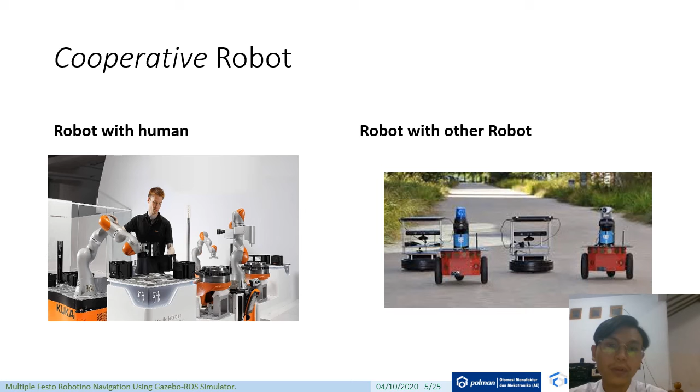So in multiple robots, we know the term cooperative robots. There are robots that work with humans and robots that work with other robots. But in this paper we are just focusing on robots with other robots. In the multiple robot system, we are using state behavior control for the algorithm.

The algorithm being used is the bug zero algorithm, and while the algorithm moves from a place to the goal position or the final place, we are going to record the environment or the surroundings of the robots by modeling a 2D map to see the surroundings.

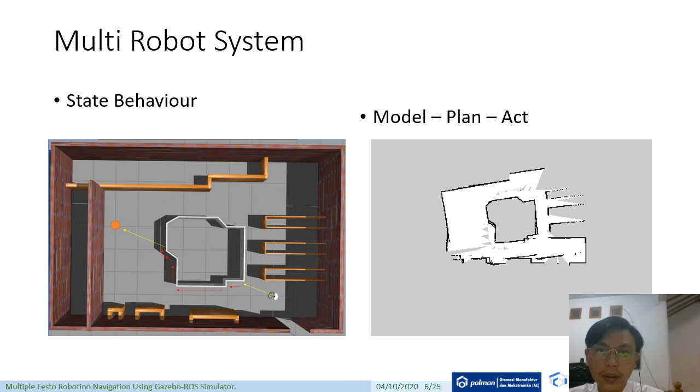In this system, we are working with the open source Robot Operating System. Why are we using this? It is because it is available for most robots, it is easy to modify, and it is low cost. So I can say that it is free to use. And this is the motivation of the project.

As I stated before, we are currently facing Industry 4.0. We're going to face a lot of development of robot technology, and also recently we use multiple robots in industry, especially smart warehouses, and we are currently introducing open source systems for robots.

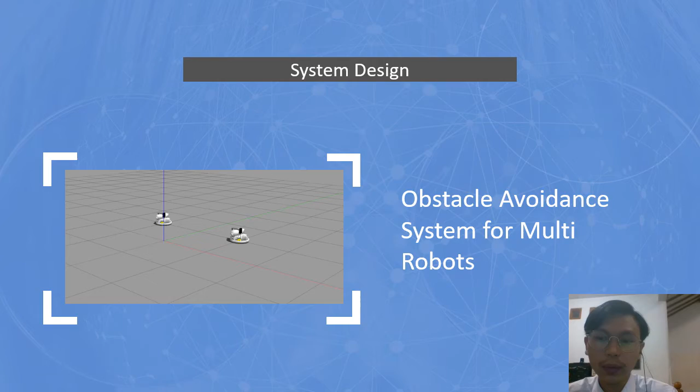The goal of the project is to design a multi-robot system that can avoid obstacles while reaching its goal and to simulate the multi-robot system in Gazebo ROS for further implementation on a real robot. For the system design of the obstacle avoidance system for multi-robots, as we stated before, we are going to use a bug algorithm. The bug algorithm has two states: go to point and follow the wall.

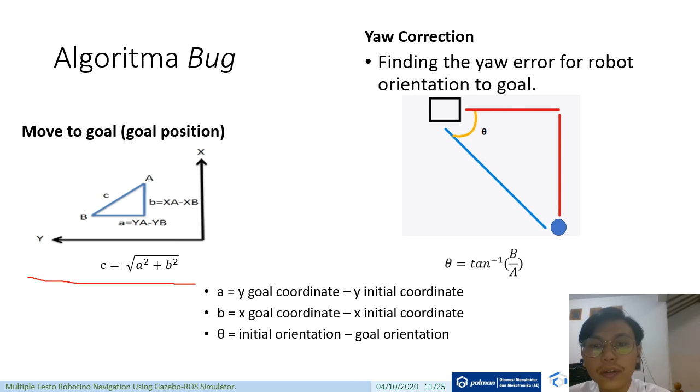For the move to goal state of the bug algorithm, I'm going to use this equation, and we are going to input the final position of the robot in the system so it can move to a certain place, and after that we are going to use the kinematics of the robot so the robot will move to the place we desire. As you can see, the kinematics of the robot will provide us with the velocity of the robot and the calculation of the position of the robot.

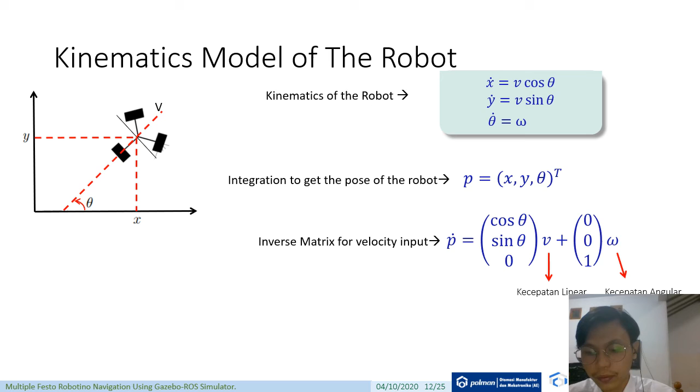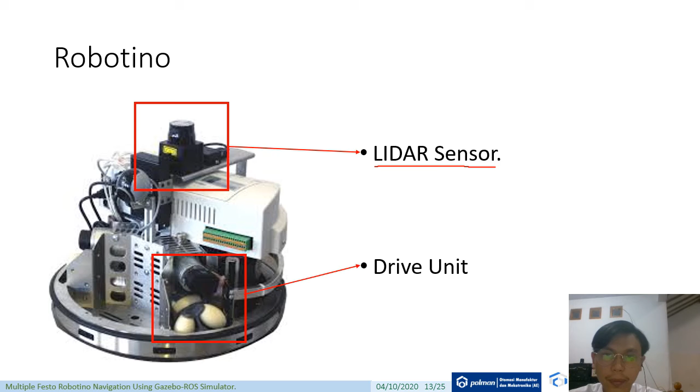In the Robotino system, in the model of the robot, I'm using two main components: a drive unit and a lidar sensor. The lidar sensor is going to read or scan the environment, and the drive unit will be responsible for moving the robot to the desired place. So that is the drive unit.

So in the Robot Operating System, as I stated before, we are just going to focus on these three: control, the model of the robots, and the visualization. We are using the Gazebo simulator for the visualization, and the model of the robot will be defined by the Unified Robot Description Format.

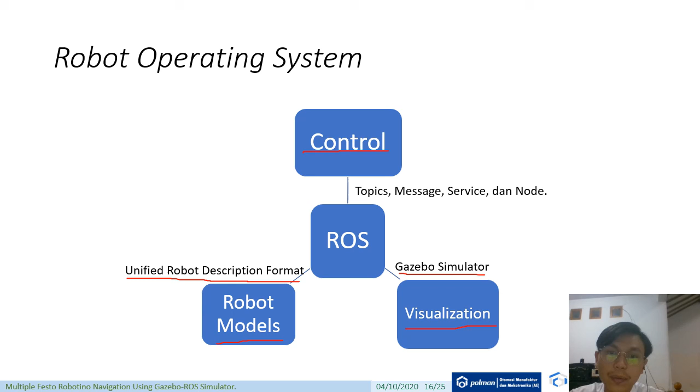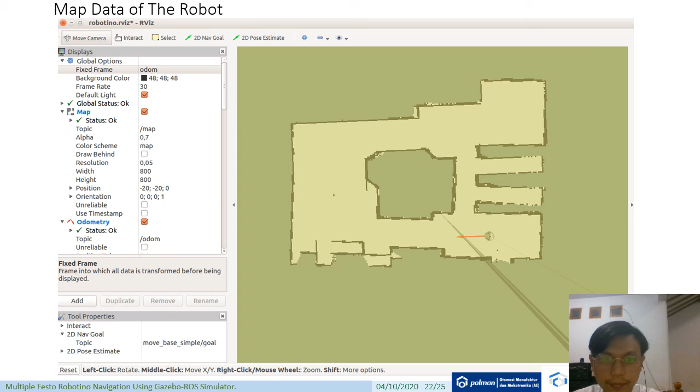So the conclusion of the project is both robots are able to reach their goal without any collision, and the simulation provides the map as the robot moves in the environment. There are better algorithms such as A-star that can be used to navigate in the enclosed environment without problems when finding a dead end or U-shaped obstacle. A multi-agent system is needed to determine robust communication between robots. The A-star algorithm can actually be used with the map that we built before.

In this video, I will show you the mapping process of the robots. We are using the Gazebo simulation and RViz visualization to visualize the map being built by the robots.

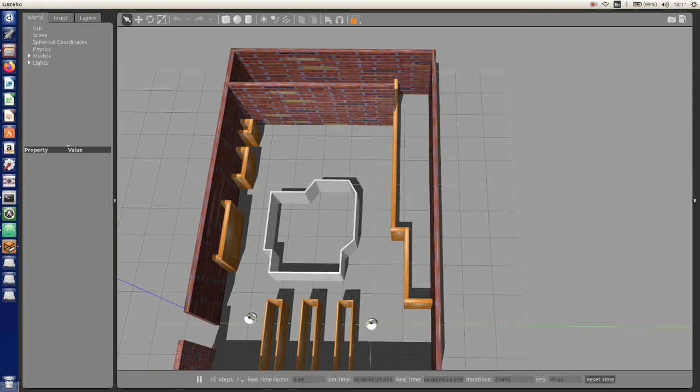And in this video, I will show you the system working in the enclosed environment. The robot will try to move to the other side of the room, and in the process it will try to avoid the obstacle by following the wall. And after it is free from the obstacle, it will go directly to the goal.